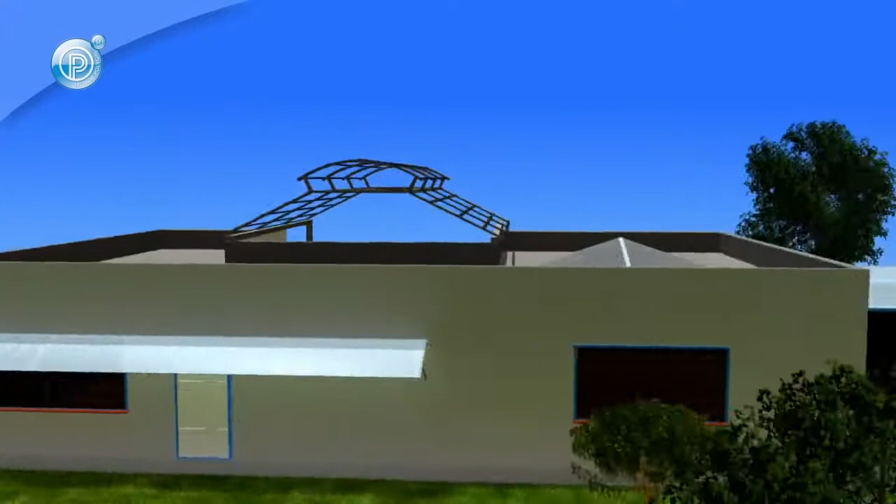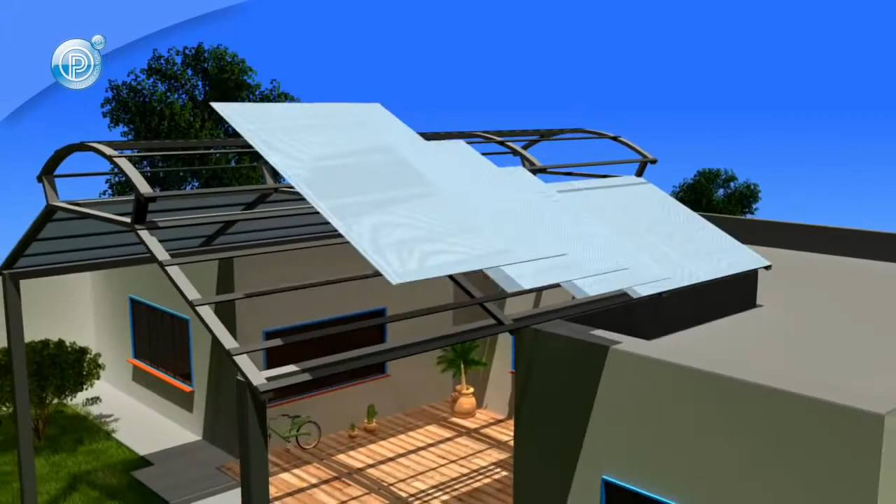When installing Polygal multi-wall polycarbonate sheets, ensure you follow the recommended installation instructions or consult with your local professional. Polygal also offers technical support for your convenience. So let's get started.

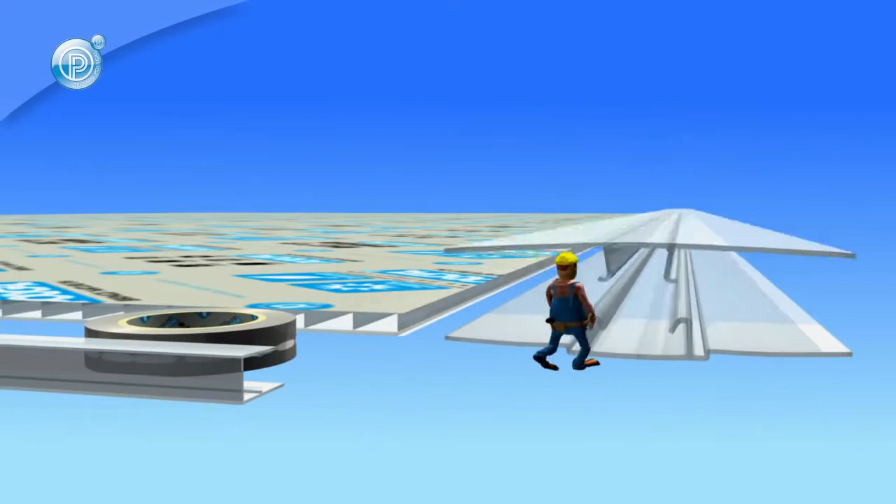Before beginning, check that all of the required parts are present, including Polygal sheets, sealing tape, edge profiles, base and cap profiles, screws, and seals.

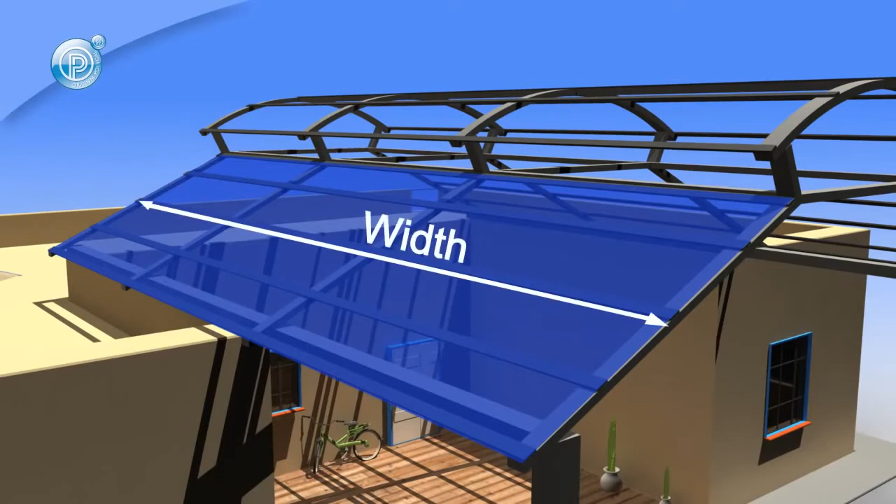Do as much prep work as possible on the ground before installation takes place overhead. This minimizes excess labor, saves time, and is generally a good safety practice. Avoid stepping on the sheets after installation, as this is dangerous and can also damage the sheets.

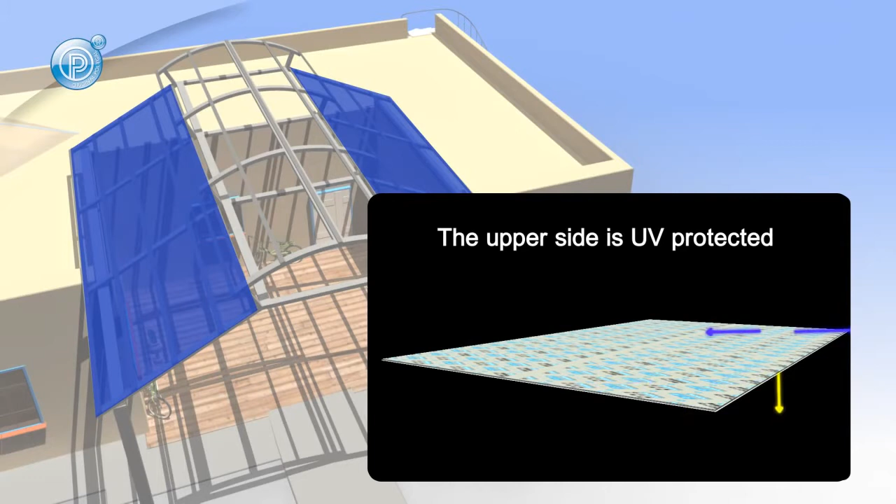If you need to store the sheets and profiles outdoors prior to installation, make sure they are covered with a non-PVC tarp. Polygal sheets are UV protected on one side, indicated by the protective film printed with the Polygal logo, so be sure that this side is uppermost. Be sure to remove the plain protective film from the underside of the sheet.

Polygal sheets can be cut using a fine-tooth circular saw. Ensure the cut lengths fit the structure with a minimal overlap.

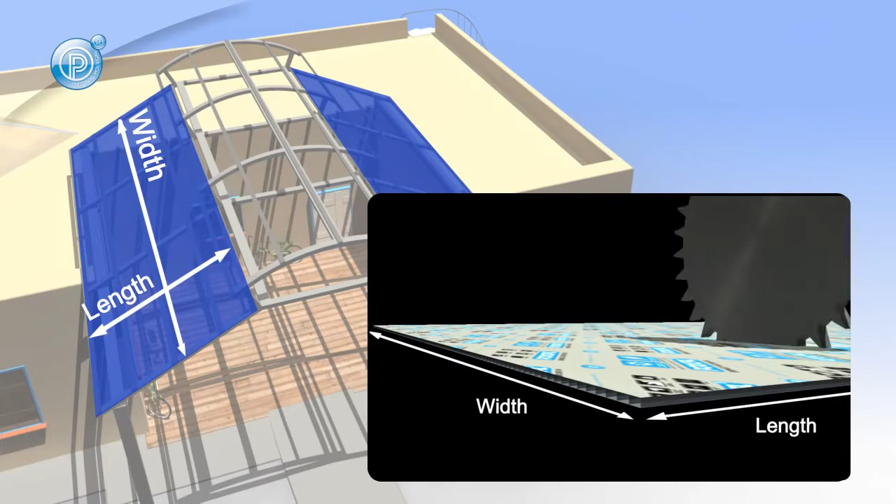Pull the protective film back at least 10 centimeters around the entire perimeter of the sheet and install the sealing tape on both ends of the sheet to seal off the open flutes and pre-drill aluminum profiles if needed.

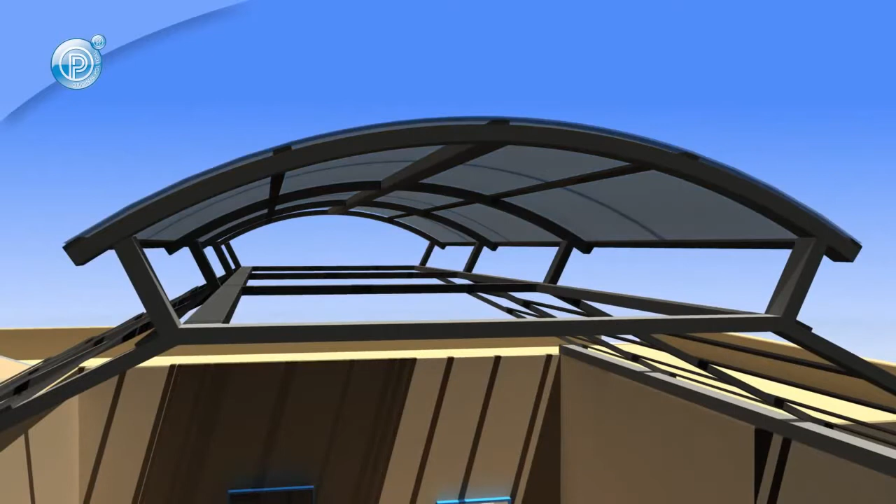If you are installing Polygal in an arched configuration, take into careful consideration the cold bending of the sheets and profiles. Profiles should be cut longer than the sheets.

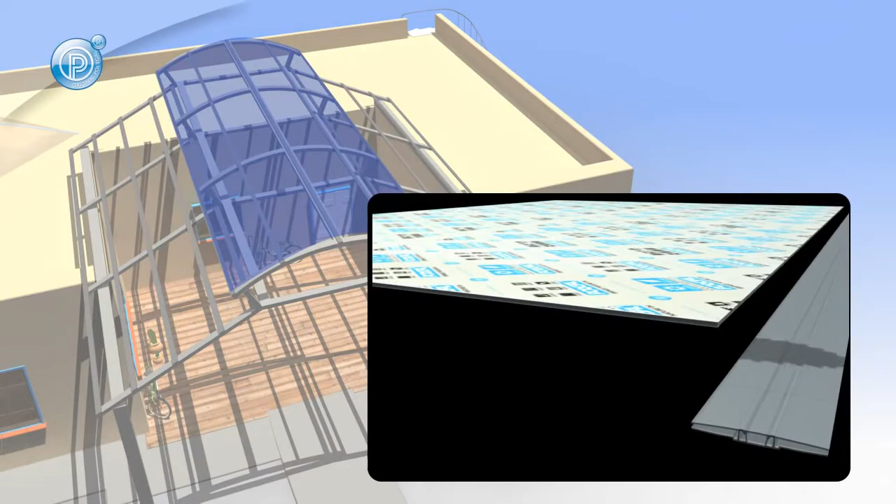The ends can subsequently be aligned using an electric saw when installation is complete. Ask your local representative or technical support person for the minimum bending radius of sheets and profiles.

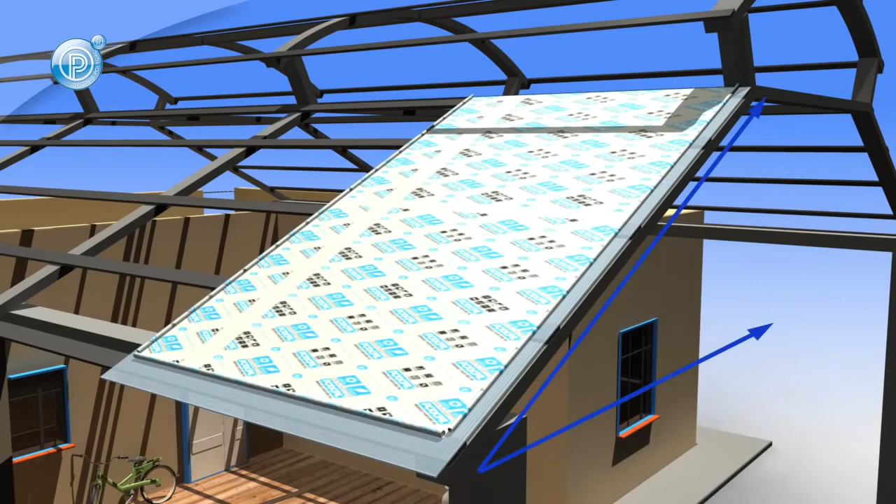When installing Polygal as a roof or canopy system, be sure that your minimum slope is at least 10%. During installation, make absolutely sure the sheet flutes go in the direction of the slope for proper drainage and moisture evaporation. Once installation has begun, ensure proper alignment and placement for subsequent sheets and profiles.

Keep in mind that the lower edge of the sheet should project slightly over the edge of the lower joist. The base profile should be fastened to the structure's rafter or purlin supports.

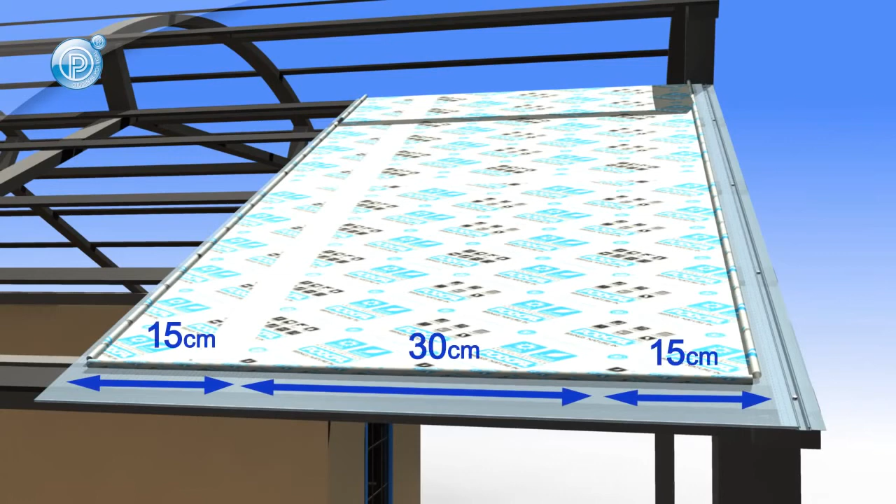Fastener location should be as close to the middle of the base profile as possible when securing it to the structure. Before installing the screws through the sheet into the rafter or purlin, make sure to pre-drill holes slightly larger than your fastening screws to allow for thermal expansion and also allow for the gasket or spacer between the base profile and the structure if needed.

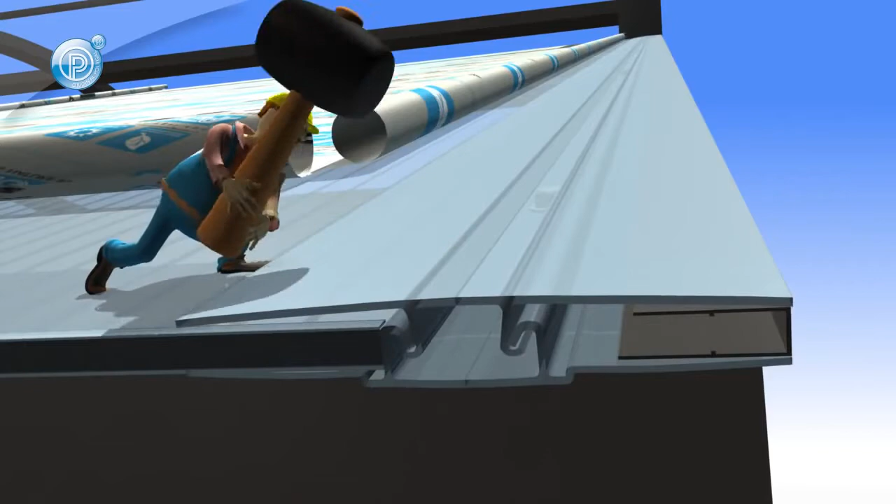After securing the base profile and sheets, the cap profile should be installed. When using polycarbonate profiles, be sure that the cap profile securely locks into the base profile. For aluminum profiles, ensure that the cap is firmly screwed to the base with proper stainless steel, self-tapping screws, and EPDM gaskets as well. Repeat this process until installation is complete and secure.

The last step in the installation process is to remove the printed protective film as soon as possible.

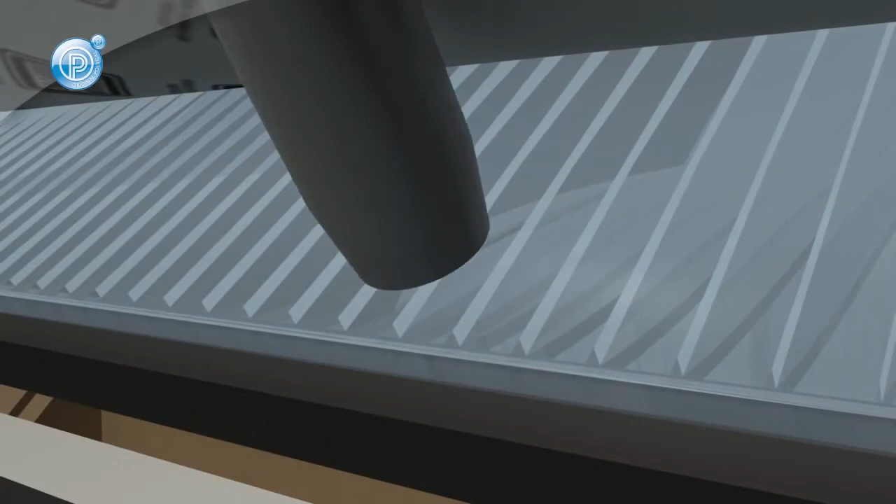Do not leave this film on the polycarbonate, as extended exposure to the sun's rays will make it nearly impossible to remove. In closing, please remember that these are only general guidelines for installing Polygal products and are not a substitute for the detailed installation instructions available on the Polygal website or professional advice from your Polygal distributor.

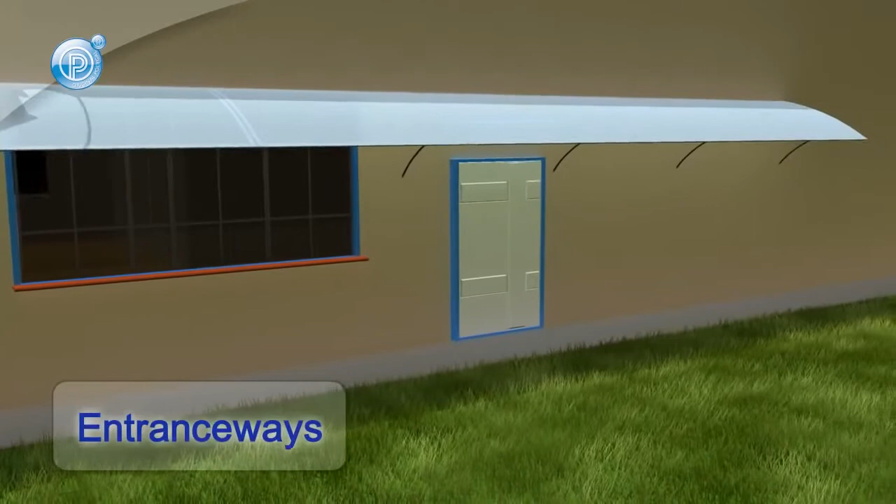Polygal brings nature in.